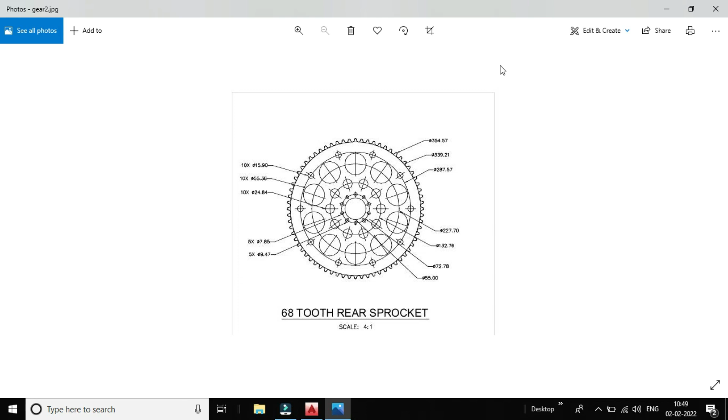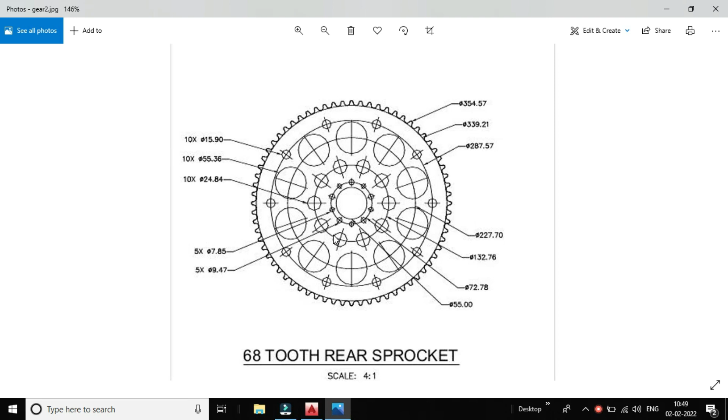In this video we will be drawing this gear in AutoCAD. It is a sprocket having 68 teeth. So we are going to draw this 68 tooth sprocket in the AutoCAD version.

Okay, so let us go in AutoCAD and draw this one. Let me open AutoCAD and click on the start drawing option here.

So here the drawing sheet is given. First of all we have to create the units, dimensions and limits. For that, click here and click on UN.

So here you can see the units dialog has appeared. Click on this one. After clicking on units, here you can see it has been given. You can select whichever way you want, but I am selecting decimal since the gear has only decimal measures, decimal lengths and distances. I am selecting 0.00 precision. Next, let us click on this OK option here.

After the units have been set, we have to give the dimension units and length units. For that click on this D, enter. After clicking D enter, the dimensions dialog will open.

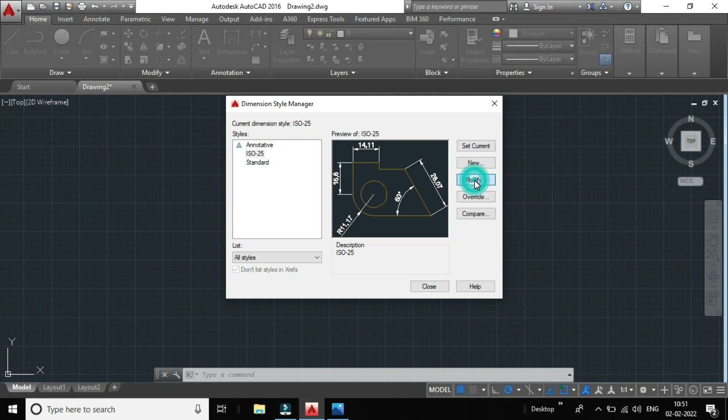In the dimensions we have to give the precision and units which we will be taking. Click on this modify option. Here you can see decimals are decimals only, and the precision as we took earlier in units is continued here. Next click on OK, and then click on close.

So it has been given. Next we have to give the limits for this one. I am giving LIM enter, so limits can be seen. Here I am giving the lower left corner limits as 0,0, enter, and the upper right corner limits as 1000,1000, enter.

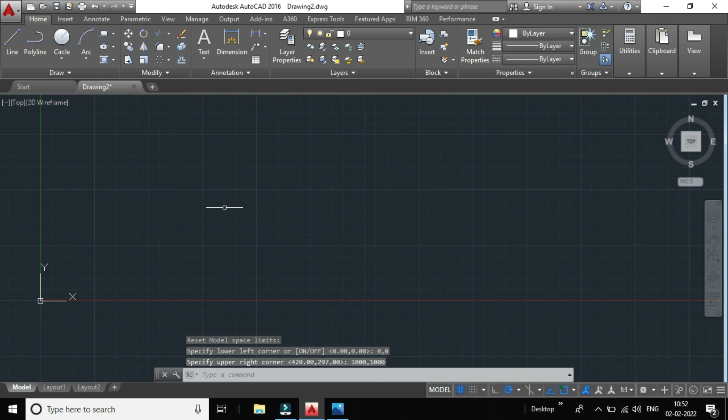Okay, so the sheet has been provided for us. After being provided with the sheet, our next immediate step is to draw the outer circle and the circles inside the outer circle. So for that let us see what is the outer circle.

So here you can see the outer circle has a diameter of 354.57. Let us draw this outer dia circle, and next the inner dia circle will consist of 339.21. Let us first draw this circle.

354.57. Click on the center diameter. So here the circle has been given.

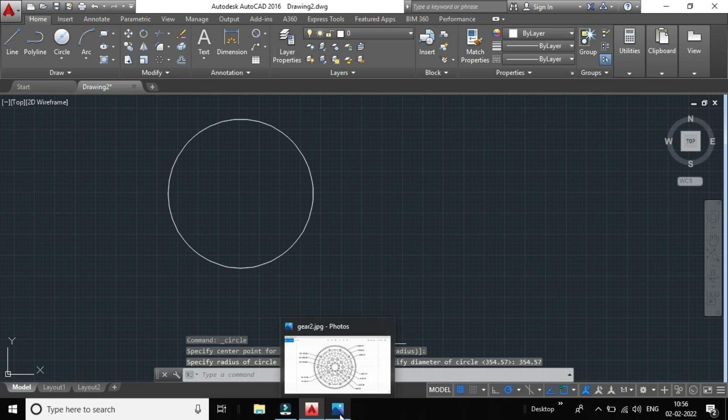354.57, next the inner circle is of 339.21. So for that click on circle 3. You can see here it is 339.21, on the circle. So here the inner circle is also being given.

So our next step is that we have to give the teeth for this one. For that click on this line enter option here. From here onwards we will be taking, click on this F8. Click on this one, and you have to give a certain angle.

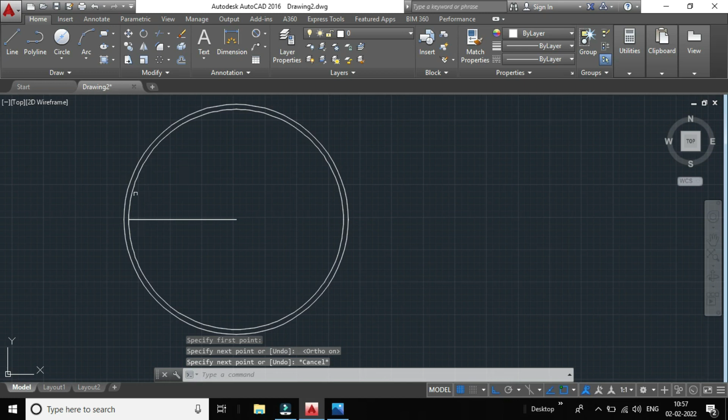So let us see what the angle will be, since it is a 68 tooth sprocket, so it will consist of totally 68 teeth. So for that, here you can see we have to take the circle here.

Or let me create a circle and see how it is going. So for that go here and let us take a circle.

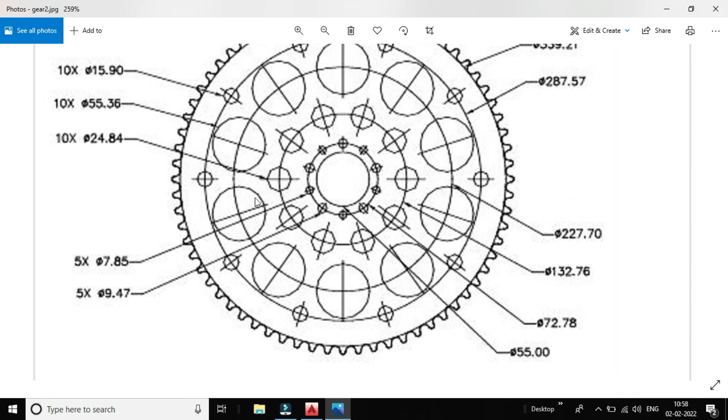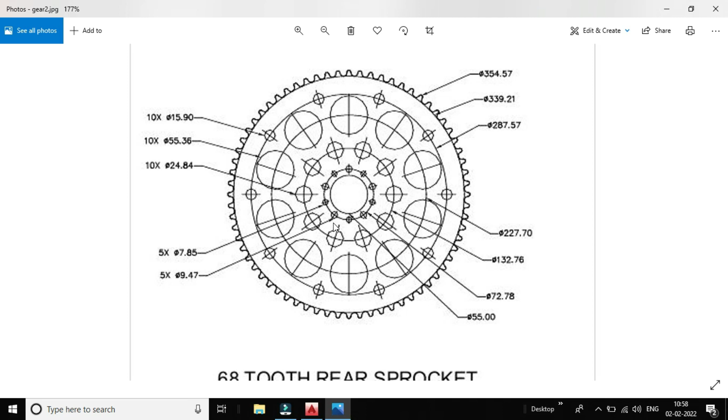Let us take this 7.85 mm circle. For that click on circles, let us go here, so 7.85. Click on this intersection here, so it is not at all good. So for that let us delete this option. I will be drawing the circle by connecting with these two.

On this side, click on this move option, let me move this to this side. On the escape option here, let us copy this circle and create an array. You have to specify the center point of an array.

The number of items will be 68. Here you can see it is 68. Again 68, click on the center option here.

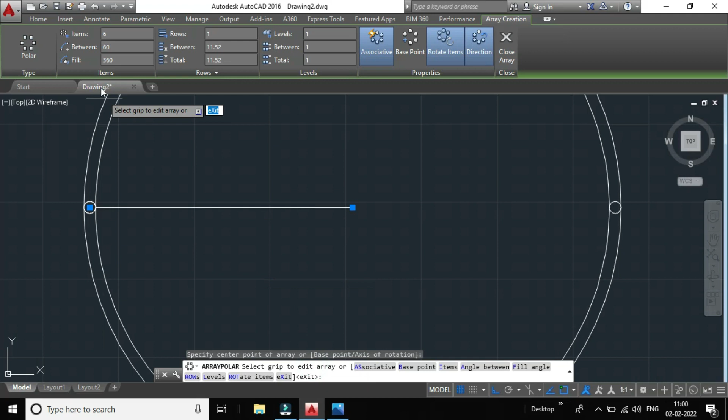So it is becoming too large. For that, let us give the circles by normal means only. Instead of giving circle, let us give this one.

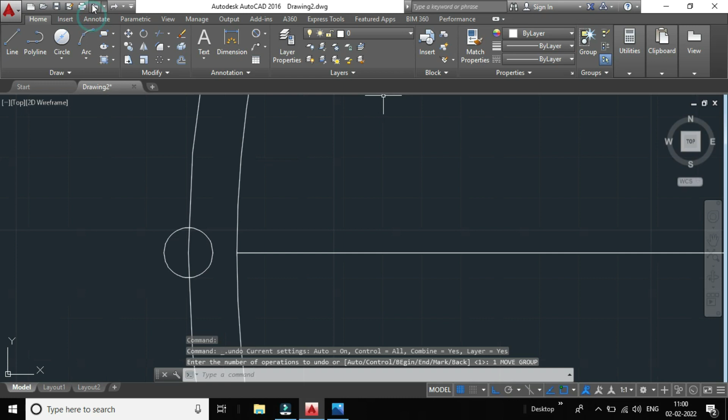For that, go here in polar tracking mode, click on this 45 one, click on this line and let us give this one here. It will be of 150.

To give this with such distance, less than what will be the angle. I think the angle will be taken as minus 30, so it will be 150. Let me give this from here at 150.

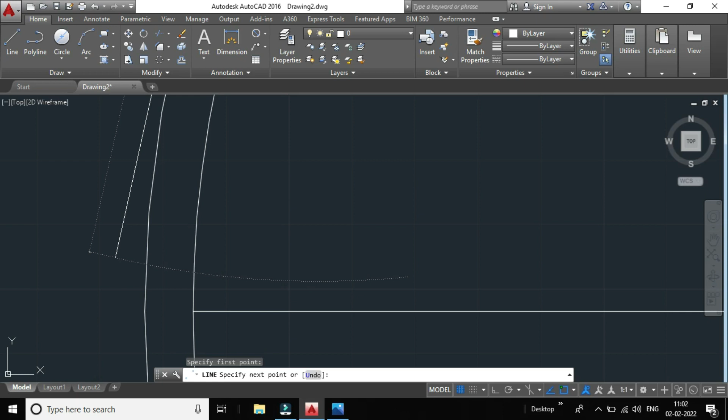Direction. For that directly we will be giving it. I am giving 14 less than 150 degrees. Click on escape option here, so it has been created here, you can clearly see.

Next, before that let us see whether it is intersecting or not. Here it is intersecting. For that, click on this mirror option here, specify this point, and let us give to this side.

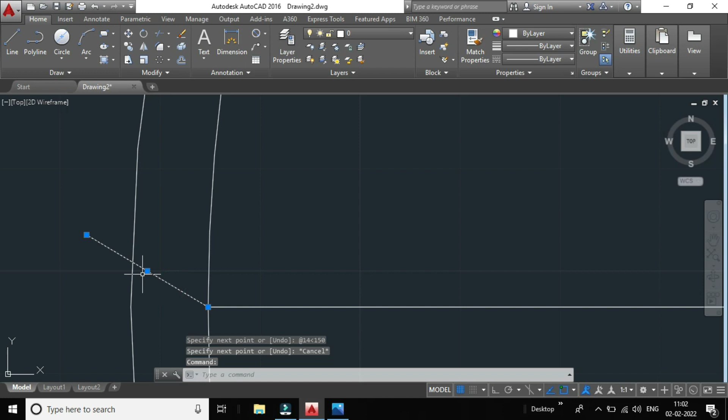For that click on this F8 option here, on this one. Let us make a fillet out of this. Click on this fillet and let us give some radius. The radius we will be providing, let us give the radius as 10.

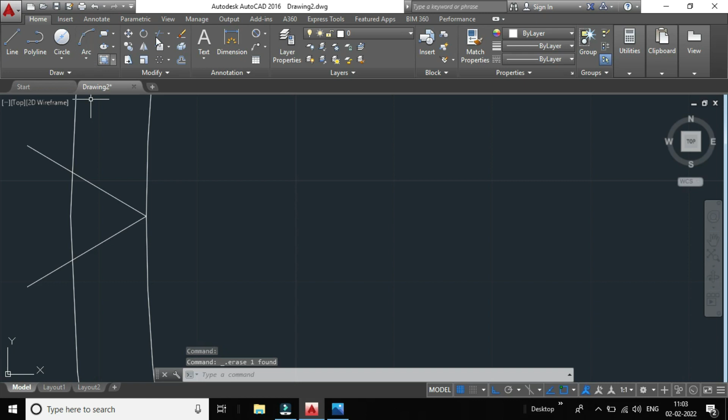Let radius, click on this option. So we have to select radius. Click on enter. I am giving the radius as 5. Click on enter.

Click on this one. Next we have to join this one. Select this one, click on J, enter. It will be joined. For that...

Click on this escape option here. Since it is not joined, click on this, select all of this, click on J, that means join. So it has been joined.

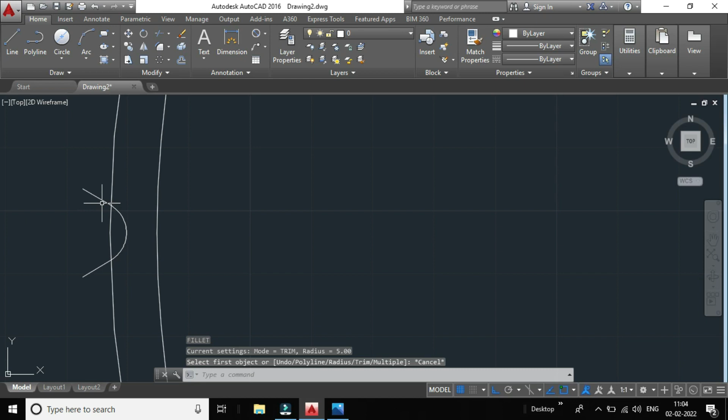Next we have to select this one and we have to move this towards this side. For that click here, click on this option here. Next we have to go to this polar array and specify the center point.

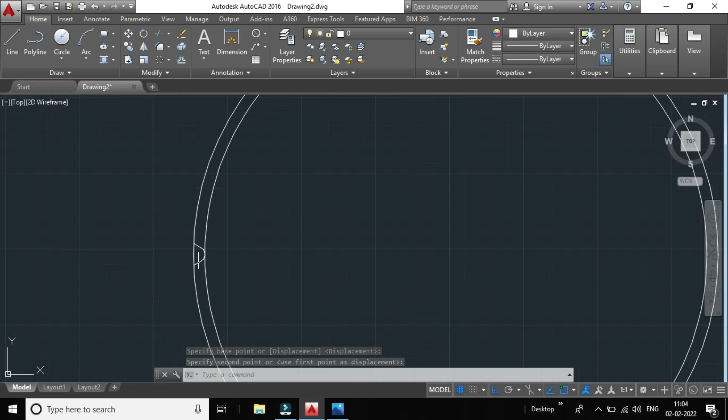So here we will be giving it as 68. Let us see whether it will be coming. So here you can see, the 68 sprocket has been given.

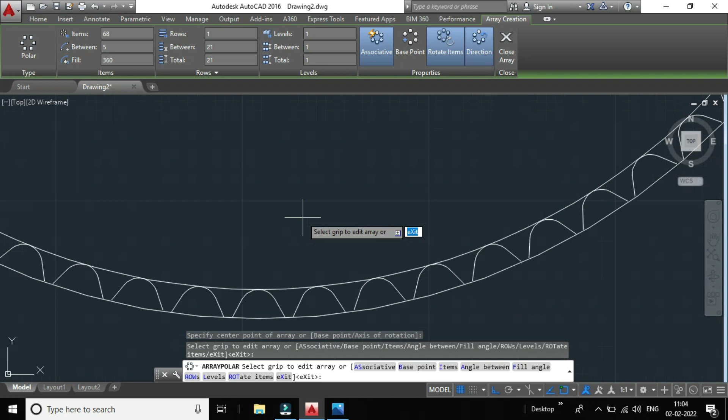Before that we have to join these ones. For that, first of all I will be joining these points. For that click on this trim option, click on this extend, click on the enter option here. Let me join this one and let me join this one.

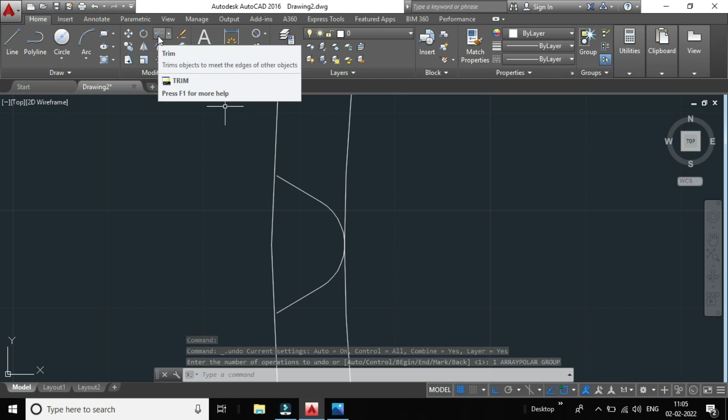Click on this extend option, click on this. Next let us go here and trim this one. For that click on this, click on trim option, click on enter here. So it has been completely deleted.

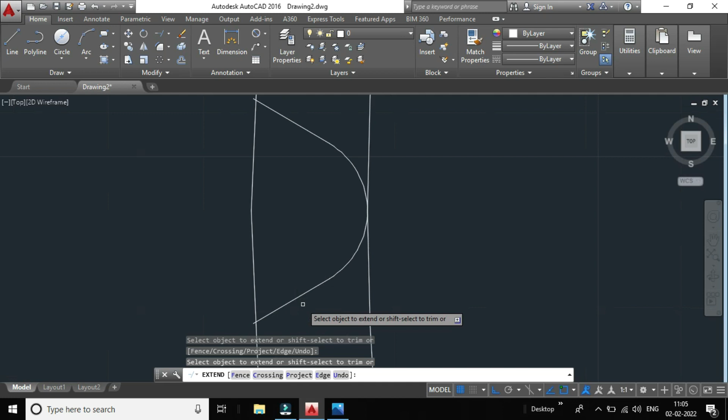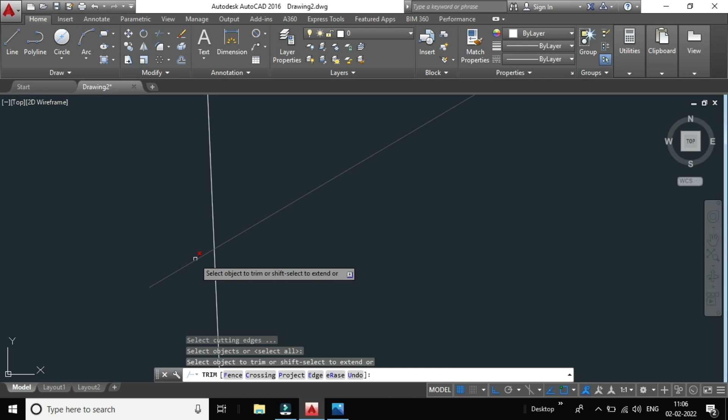Here you can see it has been joined. So in the same way we have to do this to other sides also. Click on this one, click on this array option here.

We have to specify the center point for that one. I am specifying the center point and let the items be taken as 68. Click on enter option here. So the sprockets has been given.

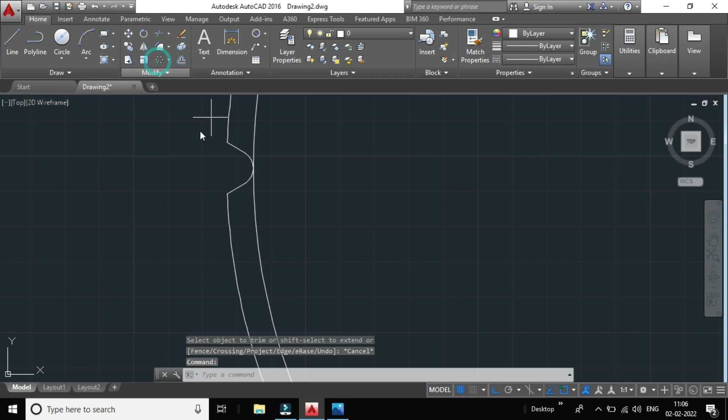Next what we have to do is we have to trim all of this part. For that, let us click on this closer option here. So here you have to trim.

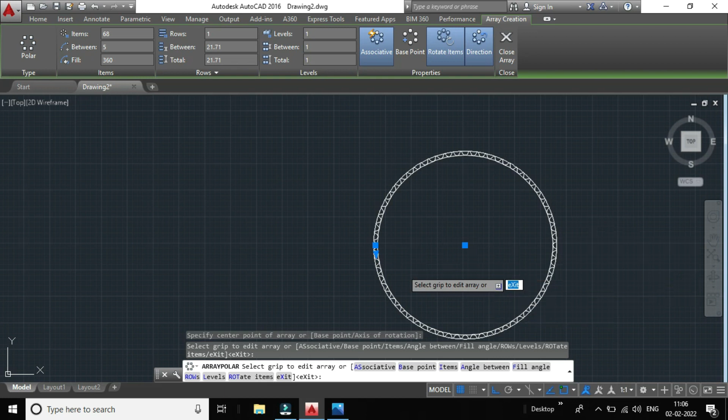For that go to here trim option here. Next click on select, or else let us trim all of this one. Let me see what will happen. Click on the enter option here.

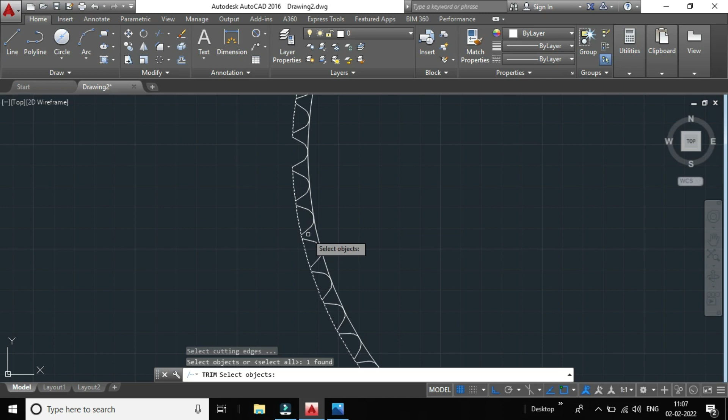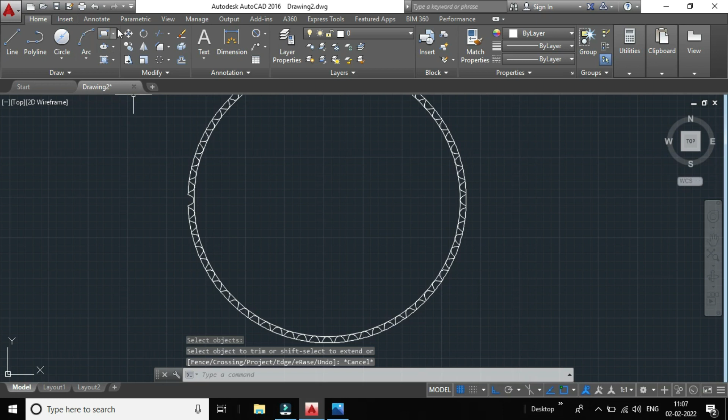I will skip the video till it has been trimmed. Also been given. Next let us close this array. And next what we have to do is we have to give the inner circles. For that go here and let us see what are these inner circles' diameters and etc. For that...